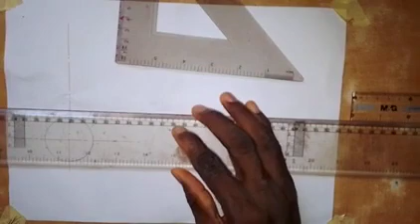So the next thing is that I'm going to draw a horizontal line from this point here. Then I'm going to draw a vertical line from this point going up like this, and from this point we also draw a vertical line. I'll make the height of the vertical cylinder 70 millimeters, and the midpoint of this 70 is 35. I want the center line of the penetrating cylinder to be at a distance of 45 millimeters from the base or top of the vertical cylinder.

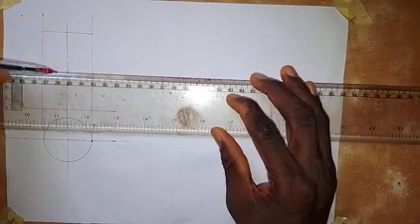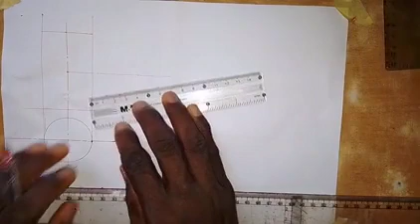So I'm going to draw a center line here like this. Then I need to extend this center line to this side. So now I'm going to take a measurement of 30 millimeters, which means that the length of the penetrating cylinder from this point is 30 millimeters. Then I will draw a vertical line through this point like this.

Alright, so the next thing is to construct a semicircle of radius 15 millimeters on this line, and also here. We put the pinpoint of the compass here and draw a semicircle like this. We divide this semicircle into 6 equal parts: putting it at this point, we draw an arc here and an arc here, then at this point we draw an arc. Bringing it down here, we also construct a semicircle.

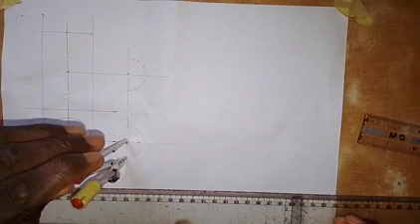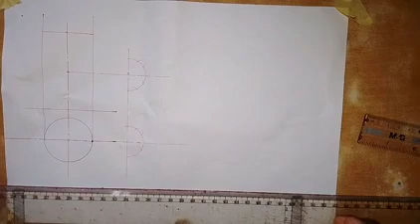What we want to do with this semicircle is to draw the plan of the intersecting cylinder. Then we will also make use of it to get the curve of interpenetration of the two cylinders. So then we are going to number these points. If I call this point 0, this point is 1, this is point 2, and this will be point 3.

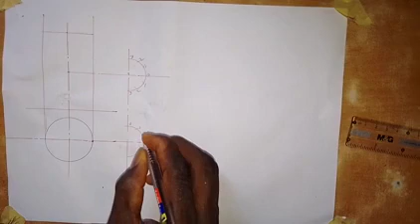Now coming down here, we alternate the numbering, in the sense that this is going to be point 3. This point will be point 0, this is 1, and this is 2, this is 2, this is 1, and this is 0. So this is how the numbering should be done. If you're able to do it like this, you get the work done with ease.

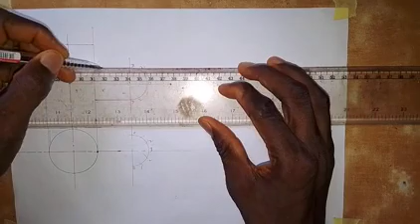Alright, so then from this point 3 here, I'm going to draw a line to meet this point on the vertical cylinder. It should be a thick line, and we also draw from here a thick line like this. This is the front elevation of the penetrating cylinder. So the distance from here to here will be a thick line, and from here to here will be a thick line all through.

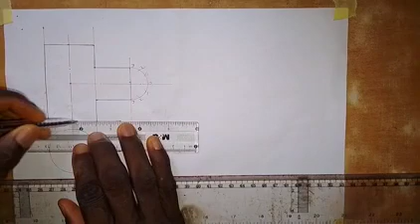So we have this. Then this will also be a thick line at the top of the vertical cylinder. Then this will also be a thick line as the bottom of the vertical cylinder. So I will also do it here by making this line a thick line.

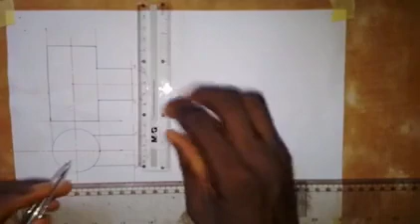So this is the top view or the plan of the penetrating cylinder intersecting the vertical cylinder. Okay, so then this line also will be a thick line like this. Alright, so now the next thing that we are going to do is to produce the curve of interpenetration. So how do we do that?

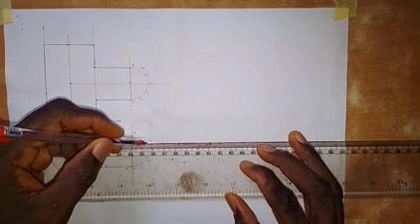So what we need to do here is that we come to this point 1 here, and we draw a horizontal line to meet this circle or to touch the circle. And also from point 2 we draw a horizontal line, which will touch the circle at this point. Then we do the same thing down here, though we don't really need to make use of this one, but we just need to draw it. So we also draw here like this.

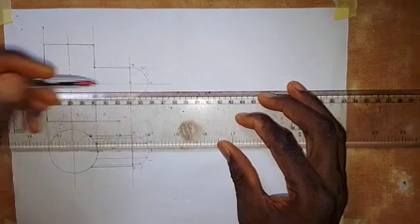Then we come to the front elevation here, so we draw a horizontal line from this point 2, so it goes inside the vertical cylinder. From point 1 we also do the same thing, it goes inside the vertical cylinder. Then from this point 1 here we do the same thing, and also from point 2 we draw a horizontal line to go into the vertical cylinder.

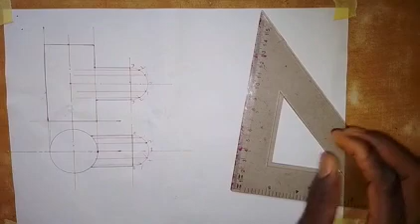So the next thing that we are going to do now is that we take our set square. If you look at this point 3, we draw a vertical line from here, and it intersects this horizontal line 3 at this point, which means that this is the point of intersection for 3. Okay, then we also have 3 up here. Then we have that of 2 at this point.

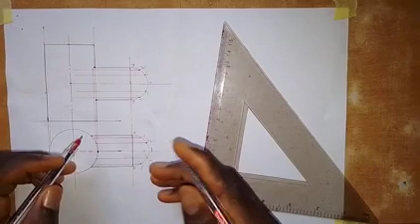So I'm going to draw a vertical line from this point on the circle, where horizontal line 2 meets the circle. So I will draw a vertical line from here, so it goes up like this. So we now look for where they intersect or where they meet. This vertical line 2 intersects this horizontal line 2 at this point. Okay, so we have it here, and we also have it at this point here.

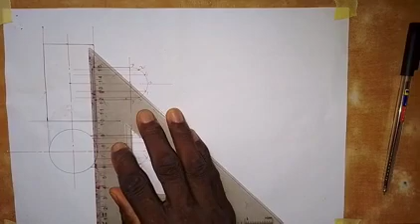So we also look for where the horizontal line 1 that we have here intersects the circle, which is this point. So we are going to draw a vertical line from this point on the circle, and it goes up like this. So we now look for where this vertical line 1 intersects horizontal line 1. So it intersects it here at this point, and they also intersect at this point.

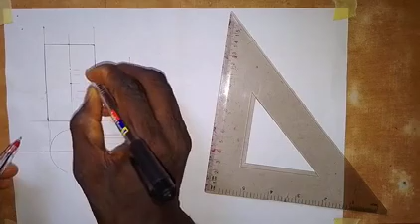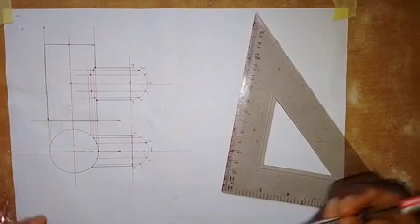So the last one is 0. This horizontal line 0 meets the circle at this point. So we are going to draw a vertical line from this point on the circle where the horizontal line 0 meets the circle. So we draw a vertical line from here, and it goes like this. Okay, so we now look for where this vertical line 0 intersects horizontal line 0, so it intersects it at this point. So we have all the points for the curve of interpenetration.

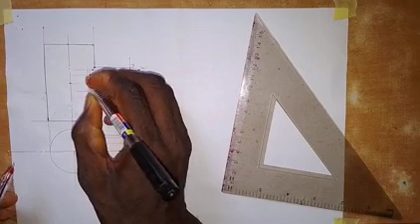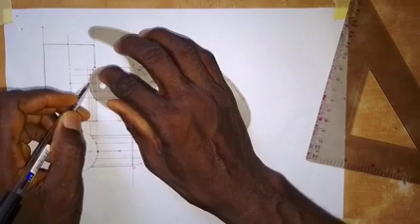So the next thing that we are going to do is connect these points together with the use of a French curve. So if I'm making use of this French curve here, I should be able to join this point together like this. Okay, then this point also, I will join them together like this. Okay, so we have produced the curve of interpenetration of these two cylinders.

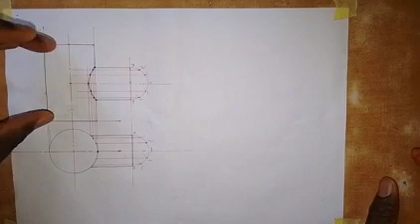So the next thing that we are going to do, as I said, we are going to develop this vertical cylinder. So the seam, that is where we have to cut it from. I'm going to use this point. So we have seam X, X. So we are cutting it from here, and then we are spreading it. Now let's look at how this can be done.

So what we need to do is that I'm going to divide the plan, that is the circle. So the plan of the vertical cylinder, which is the circle, I'm going to divide into 12 equal parts.

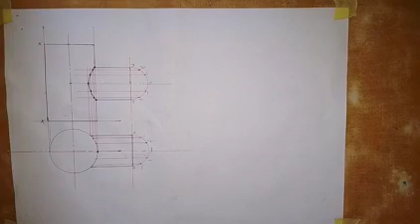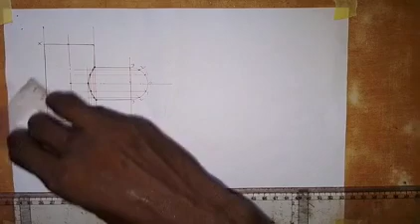So putting my set square at this point, here, I have this point, or this line being drawn, and also this line drawn like this. Then I will turn it like this, and draw this line, and then draw this line.

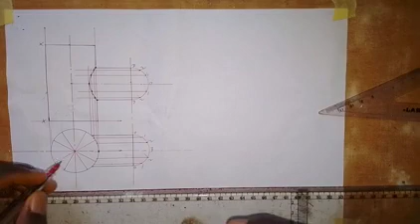Okay, so if you look at what we have here, what I just need to know is this point. If you look at the division that we did, you see that none of these lines intersect these circles, or this point on the circle where the horizontal line intersects the circle. So there's no one among them that touches any of these points.

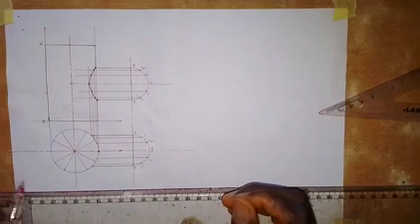The reason is that the diameters of the circles, or of the circular base of the two intersecting pipes, are not the same, are not equal. Supposing they are equal, they would intersect these horizontal lines. But because the diameters are not equal, that's why they do not intersect.

But what I just need in this construction is this point, here. So if I number this point on the circle, this is point 1, this is point 0, this is 0 here, and this is 1, this is 2, this is 3, this is 4, this is 5, this is 6, this is 7, this is 8, this is 9, this is 10, and this is 11.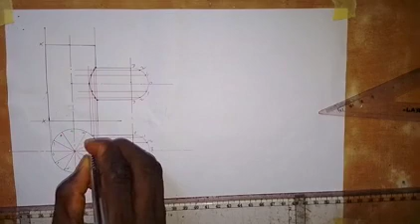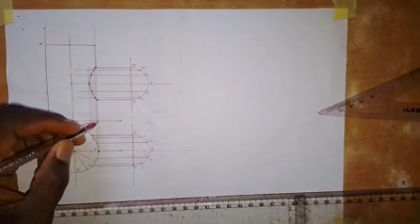So what I need is to just get point 3 and 9, which is along this line, so I have 3 here, comma, then I have 9, that is what I need. That is all that I need. Though I will still make use of all these points in the surface development, but I need this point for me to locate this point 3 in the surface development. I also need this point 0, which is this point here. So that is where we are going.

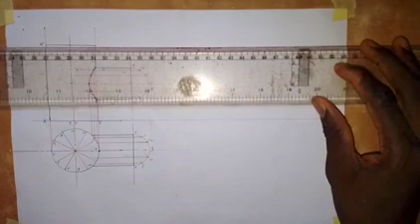It's very, very important, so let's see how the construction will go. Here I will draw a horizontal line. Coming up here also, I will draw a horizontal line here like this. Then the next thing I'm going to do is move away and draw a vertical line at this point, like this.

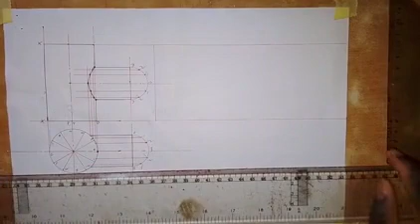So let me say something here. I also need this point, which is point 6 here, so we are cutting it from here, which is point 6. That means I'm going to have 6 here. So the next thing I'm going to do is calculate the diameter, the circumference of this circle. I'll do that while I pause the video.

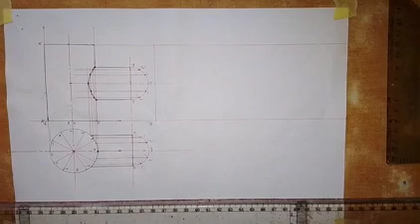So the circumference is 133 millimeters. So I'm going to take a measurement of 133 millimeters along this line from point 6. So this is 133 millimeters.

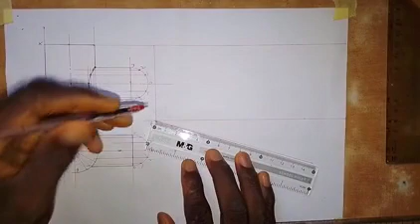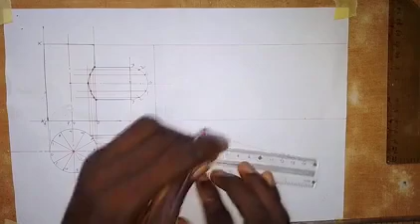Now I'm going to divide this into 12 equal parts, as we divided the circle. So what I'll do is take one centimeter, or 10 millimeters, each. So this is 10 millimeters each. So this is 7, here is 8, this is 9, 10, 11, and 12. We join the last one with this end here, like this.

Then we are going to move it to the next one. I'll pause the video while I do this because I know that you can do it. Alright, so I have done that.

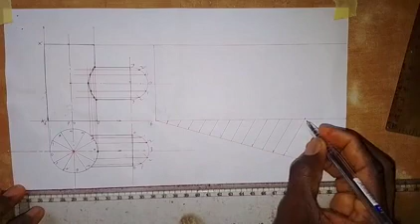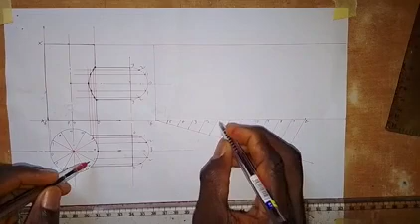So the next thing to do is for us to number. This will be 0, 6 here. Next, after 6 we have 5, 7, so we have 5, 7. This will be 0.7, and here I will put 5. Next we have 4, 4, 8. So this will be 0.4, and here I'm going to have 8 at this point. Next we have 3, 9. This will be 0.3, and this point I will put 9. Next I have 2, 10, so this is 0.2, and this is 0.10. Next I have 1 and 11, then we have 0 at this point.

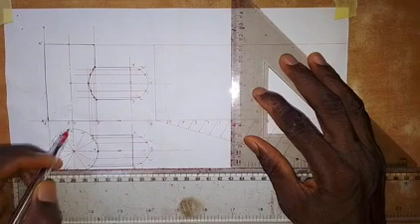So what I need to do now is erect a vertical line at point 0. I don't have to erect a vertical line on all of them. I only need this point, point 0, 3 and 9, and then 6, which we have already done here. So for 0 I will erect a vertical line like this. Then coming to 0.3 I will also erect a vertical line like this. Then coming to 0.9 I will also erect a vertical line like this.

Alright, so the next thing to do is locate this point. Let me call this point X here, that is this point. This point here is point Y. Then this point here I will call point Z.

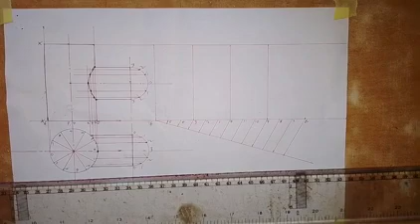So now what we need to do is, with our compass, put the midpoint here at 3, 9 and extend to X here. This is point X here. So I put it at 3 and make an arc, and I put it at 9.

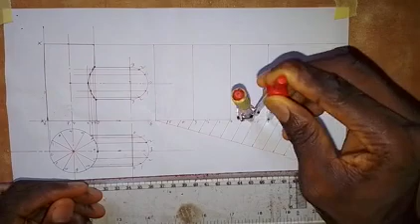Then at 9, I make an arc here. So this is point X, and also we have point X here.

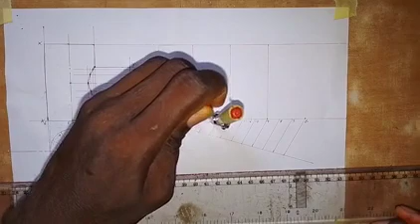Next is from 3 again to Y. Putting it at 3 here, I make an arc, and also putting it at 9, I make an arc. So this point is point Y, and this is also point Y here.

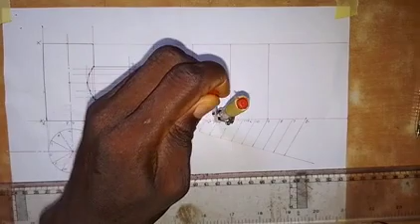So the last one is Z, from 3 and 9 again, extending it to point Z. I have this at 3 here, and also at 9. So we have Z. This is point Z here, and also we have Z here.

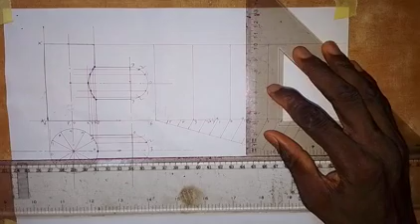Alright, so the next thing we are going to do is, with our set square, erect a vertical line at this point. I will draw a vertical line here, and at this point also. At this point I will draw a vertical line at point Z, and from Z I will draw a vertical line, at Y I will draw a vertical line, and at X I will draw a vertical line. So these points are very, very important.

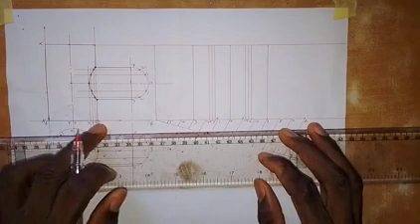Now this is point 0 here in the surface development. So we have 0 here, this vertical line 0, I will draw a horizontal line from 0. The 0 I'm talking about is this here. We are making use of these points: 0, Z, Y, X. So for 0, I will draw a horizontal line from here, and it goes and meets 0 at this point.

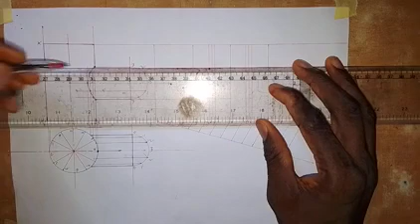So I will come up here also. We also have 0, this 0 also goes up to this point. We have it here. So here also I will draw a horizontal line from here like this. Here we have 0, this is 0.

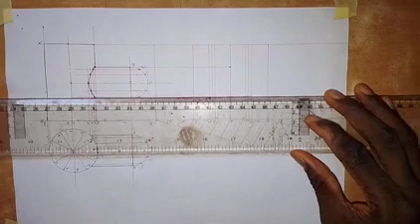Next is from Z. I will also draw a horizontal line to meet line Z, so this will go all through. Then I will also come up here, we also have it up here, so it goes all through here. So for Z we have this point, then we also have it here, we also have it here, and then we have it at this point here.

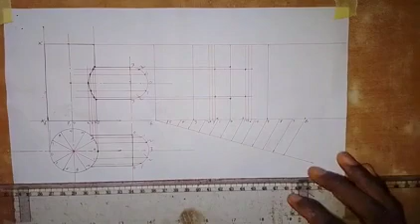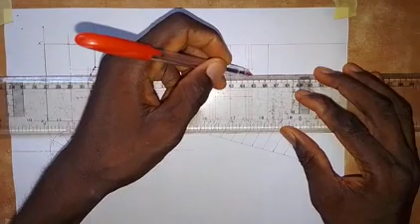Okay, so next is for Y. I will come up here, so this is line Y here, so this is the point, and we also have it up here. So here I will draw a horizontal line from here like this, and coming up here I will also do the same thing. So for Y we have this point, we also have this point, then here we have this point for Y, and we also have this point here for Y.

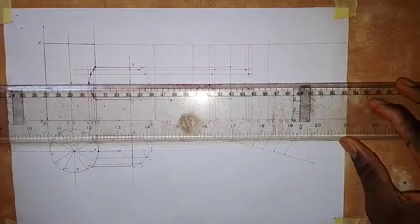Okay, so last one is Z, which is just this point, so we're only drawing one for that. I'll come up here and draw a horizontal line like this. So this is point Z, point X, this X, and this also X.

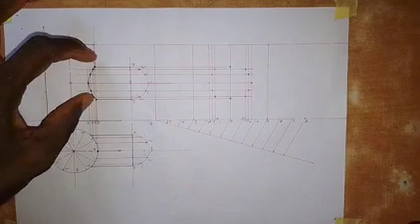So now we are going to join this together to form the shape of this part. If we have it as a solid before us, we are going to see this hole around this part of the cylinder. So with my French curve, I will do that now.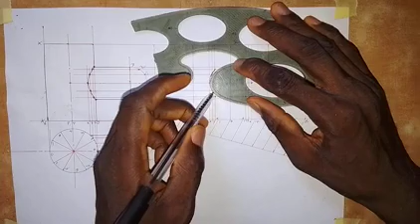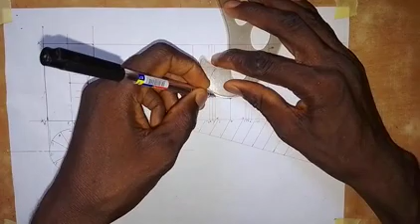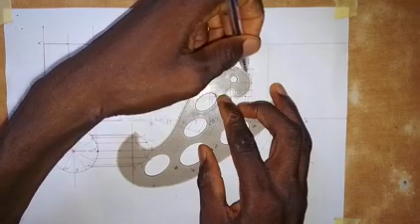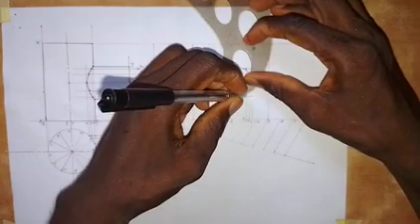Setting it like this, I want to make sure we have a very smooth curve, so I'll try to get it done. The points are not really regular.

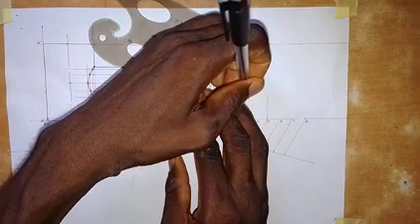Alright, so that is the shape there. That's the shape that we have.

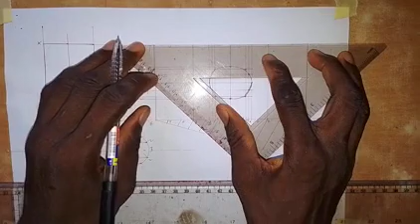So also at this point I'm going to erect a vertical line. We'll make this vertical line a thick line, and we'll also make this one a thick line from here to here. Then this line, we make it a thick line like this, and then this line here, we also make it a thick line from here to here. Alright, so this is how to do it.

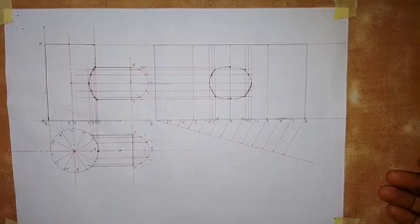So we produce the curve of interpenetration here, and we produce surface development here. It's as simple as I've done it here. All you need to do is practice. Thank you, and God bless you.